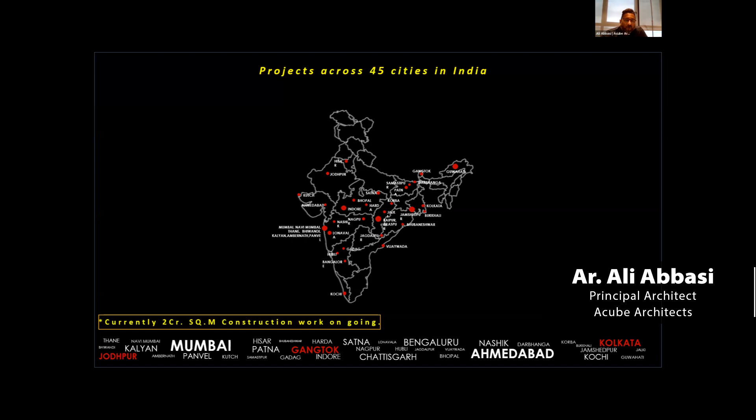Most prestigious projects in Dubai, and that's super high rise. And then in India, we're also fortunate to be currently working in around 45 cities, and we're doing a substantial amount of high rise projects across India. And high rise is something we've been fascinated with since generations.

Every empire who was successful wanted to have the tallest, wanted to reach the sky, right from the Egyptians with the pyramids, and then the Eiffel Tower. Every civilization that wants to show their supremacy has always tried to build something which is the tallest. So it's been a fascination for centuries.

People want to buy expensive lands in prime locations, and they want to maximize the potential. Plus, they want to consume the FSI or the FAR to the maximum.

The second is the iconic stature of these buildings. All high rises define the skylines of the cities, and a lot of cities are known by their high rises. Like Singapore, everybody talks of the Marina Bay Sands; in Dubai, everybody talks of the Burj Al Arab; and in Chicago and New York, you have so many. So everywhere, high rises kind of define the identity of the city. That's one of the other things it creates: iconic architecture.

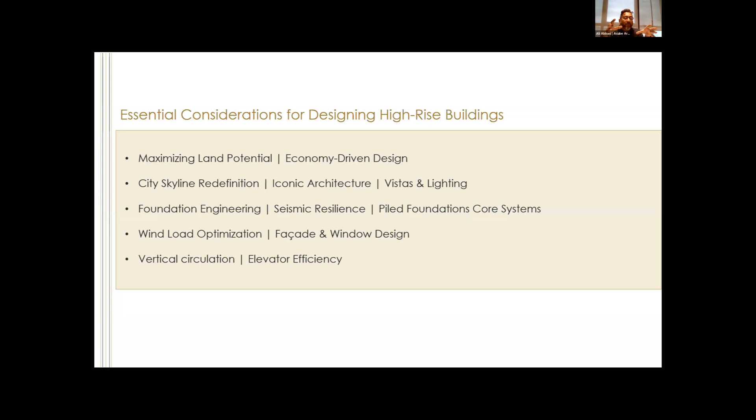So the elevators become so important, and not all companies manufacture elevators which have low breakdown and low failure rates and are designed for high rises. So even that selection of what kind of elevators and how efficient they're going to be is very important in high rise design.

So the ground, when we talk about the foundation, again, it's the first thing you need to look at - whether this kind of project can actually be built on this plot, and what precautions or what kind of foundation you need to look at. And generally you also have parking restrictions and requirements, and you have to go multiple levels of basements. So the plot on which you're planning to build a high-rise building is very important.

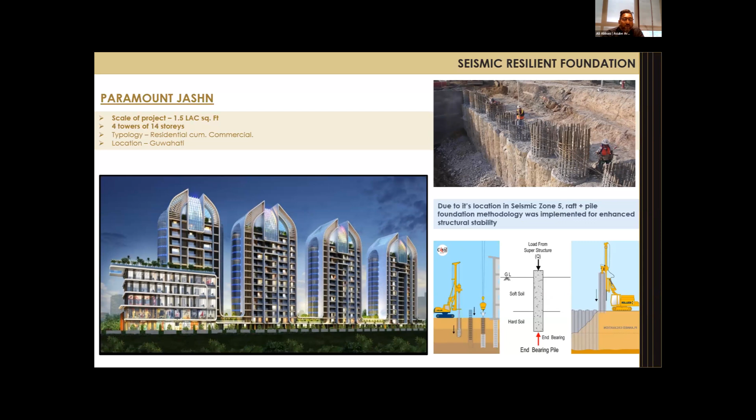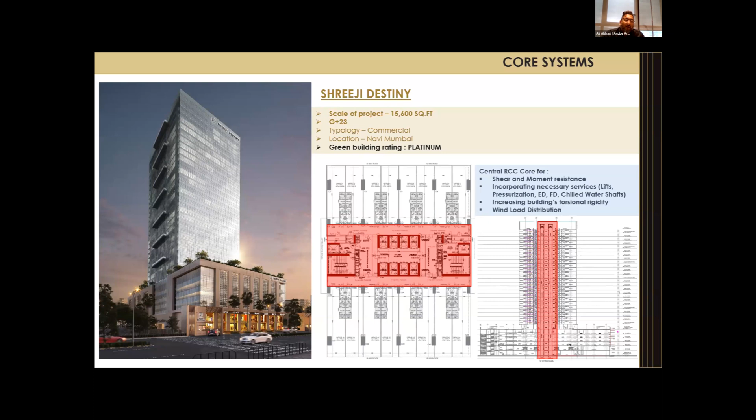And we need to see whether the kind of soil or stone or strata can take that kind of load. Now the core is a very important part of any high-rise, because the structural stability generally is with the design of the core. So if the core of the building is stable and is supporting and taking the entire stresses of the structure, then the building becomes more stable.

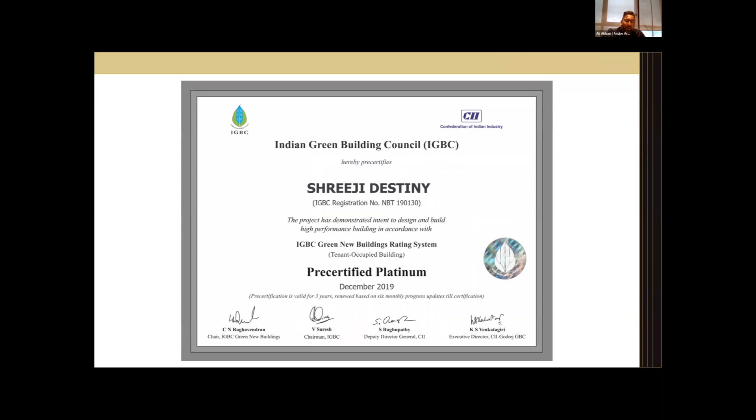Most buildings, if you're going more than 2 lakh square feet, you have to have environment clearances. And with the norms specified for environment clearances, by adhering to all those things, you probably will have a green building certification very easily, and that's what we do in most of our buildings.

High rises, as I told you, the recreational ground and open spaces are important in every project. It's so important that people have these lungs of the building, of the area, where people can actually go out and enjoy the outdoors.

Since elevated podiums or elevated recreational areas - mostly if you see, these large buildings also have a large parking requirement. With large parking requirement, it's necessary that even the entry exits, the flow of the parking and circulation is such that people in and out of the building don't have a large waiting time. In some cases we also propose multi-level car parking, going down multiple basements, or a separate parking building connected by a walkway, where people can use those for parking.

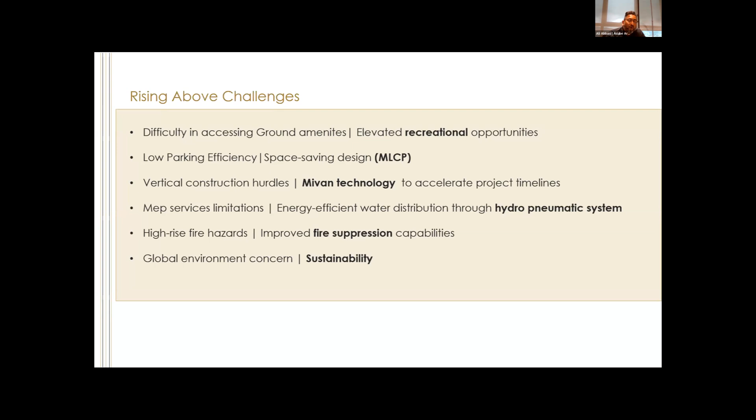Sustainability is something so important to all of us, something we need to do for the future of our next generation and the people we're going to leave the planet to. I think sustainability is not necessarily averse to doing high rise. It's a myth when people say that going vertical means you're not building sustainable. No, going vertical you can still be very sustainable, and you can use resources in a smart way.

This is another project we're doing in terms of sustainability - of course rainwater harvesting. There's ample daylight, so we make sure windows are large so a lot of daylighting comes in, reducing reliance on electricity and energy. Accessibility is good because we have enough lifts and vertical circulation. We have a sewage treatment plant, so the sewage is treated. We use low VOC paints.

We have energy efficient sanitary fixtures with sensors which don't allow wastage of water, organic waste management, solar panels on top of the buildings which we use for the landscape, the garden, emergency lighting, and multiple levels of green.

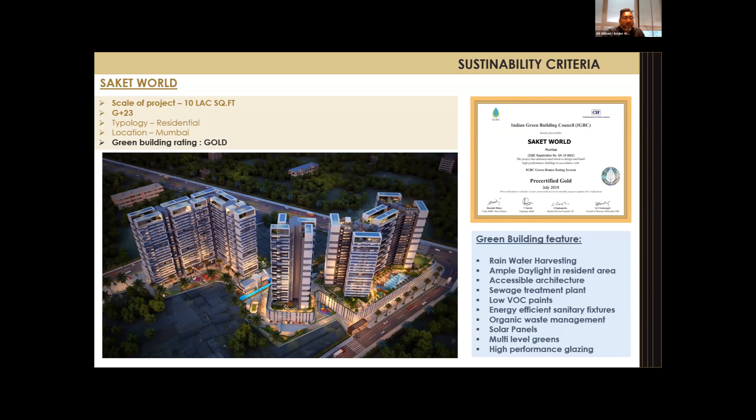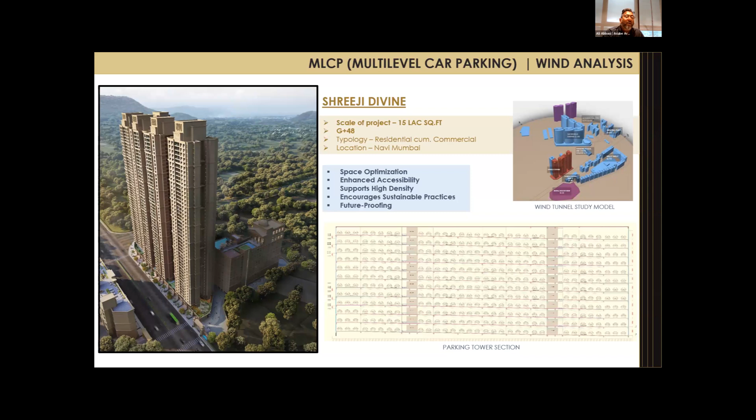The glass is very important - good glass with solar analysis to study the orientation of the building and how we can maximize light entering. As I told you, wind analysis and multi-level car parkings work well where cost-effective high-rises have to be done and we can't go down multiple levels of basements, which adds to the cost of the building.

Mivan shuttering, or aluminium formwork as it's called, is a reality that most buildings today are using - it's faster and reduces the need to plaster the buildings outside. It's easier to build, easier to use, the finishes are better, and it helps high-rise construction because you can complete the building on time. You don't need to plaster, you save cost, you save manpower, and it becomes easier to execute.

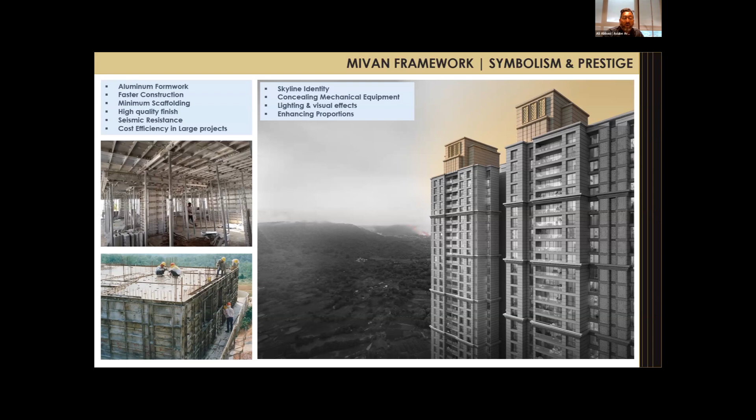Also, one important thing we need to look at is the lighting of the facades, because all these high-rise buildings need to look good at night too, in terms of the iconic beauty of having a tall structure. Lighting of these buildings is so important today, with digital screens as well as other ways of connecting people's attention towards these buildings and beautiful facades, which also generate revenue.

I think that's the way forward, where buildings themselves, especially office buildings, can be lit at night with a lot of media, graphics and visuals, which will ad generation - generating income also for the maintenance of such buildings.